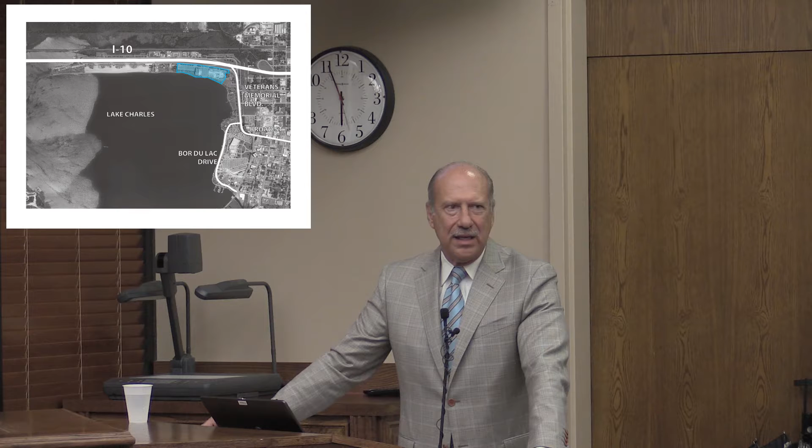So hold that thought for a second. If you tear it down, we have about 400 parking spaces in that garage. Tear it down, it would take about 4 acres to replace that amount of parking at grade. 4 acres of developable property in a downtown is extremely valuable, and I would argue that that deck makes huge sense to maintain, to create a functional component for whatever you do.

So how do you overcome the weaknesses? Well, you'll see some discussion about that. We're going to light it, renovate it, add new elevators, but we're going to keep it, and use it in a way that can be leveraged to accommodate the mix of uses we're proposing. So keep that in mind.

Bilbo Cemetery on the eastern side, everybody kept talking about it, but when we visited it, it was almost indistinguishable from the backdrop. It was not this civic piece, this historic component. So during the workshop, we decided, based on the input, that we should celebrate it. It should be part of whatever we create, part of the fabric, part of the history. And so we'll engage it. And then obviously we're going to engage the waterfront.

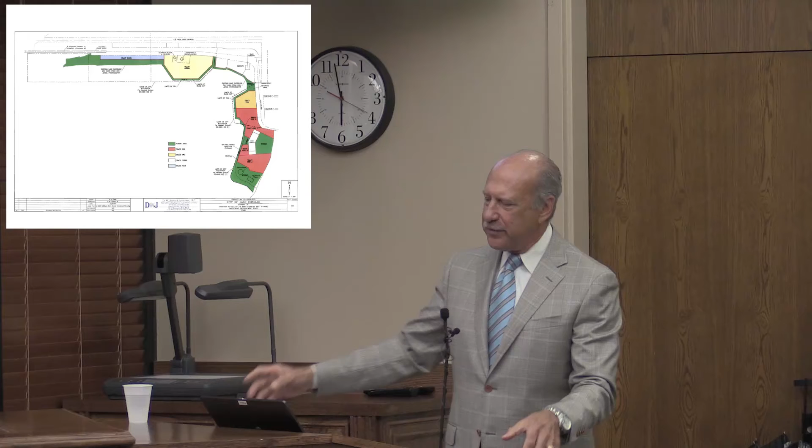During the charrette in 2007, and again prior to the charrette in our preparation for this workshop, we were envisioning this magnificent marina, this romantic kind of European place where we could see sailboats docking. Unfortunately for us, that area of the lake has been silting in for a while, and it appears as though it will consistently silt in. So from an economic perspective, it didn't make total sense for us to go in and create this marina.

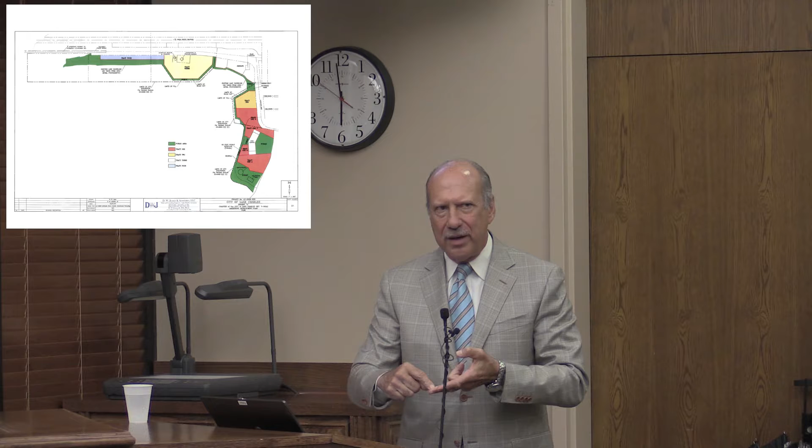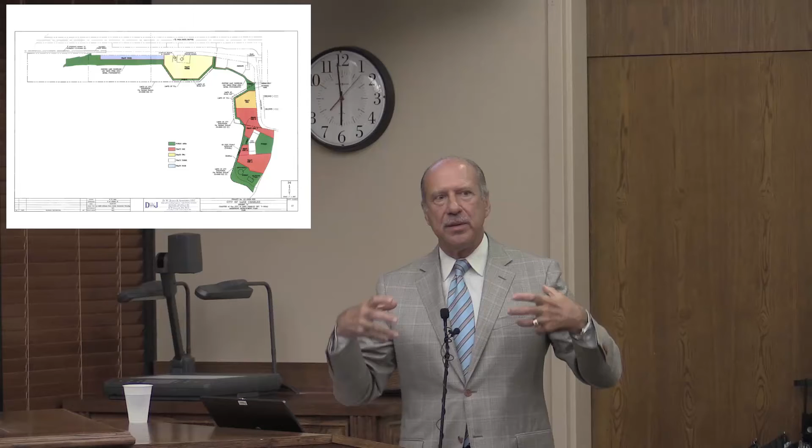But we did want to acknowledge that we're on waterfront. We want to engage it in more ways than simply looking at it. And it came out over and over again that boaters in this community would love to be able to take boats to a place where they could go to food service places, retail, venues of entertainment, things of that nature. So what we did, as opposed to having to dredge this periodically and frequently, we would bring finger piers out into the lake and allow boaters to come to the finger piers and access the waterfront and the docking facilities. So you'll see that in this presentation.

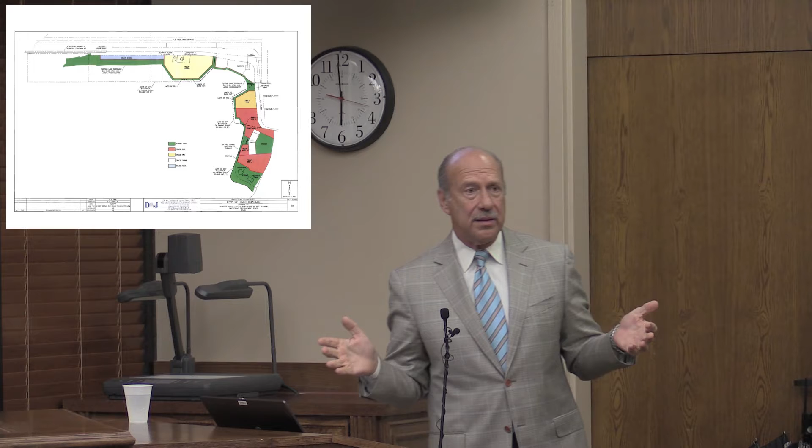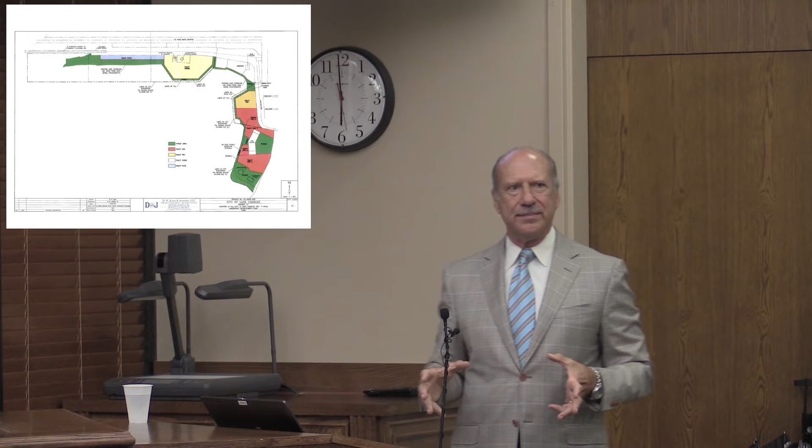The other control point we had was that there is a mandate in the master plan and in legislation that there be a 25-foot public walkway fronting the waterway. You cannot make it private. So we had to adhere to that, which we found to be actually an amenity and not a negative. So keep in mind, when you see the drawings, that was part and parcel of what we wanted to do.

The other thing we did is we tested the participants in the workshop. We said, listen, as you have a clean slate, we can develop any kind of buildings you want. You can do modernist, you can do traditionalist, you can do something in between. What would you like? And overwhelmingly, people said, this is Lake Charles.

We want it to be Lake Charles. So let's celebrate Lake Charles. Actually, there were some people who said, let's look like Austin, because Austin is a big success now. Let's create Austin. And the group, the way the process works, said, why do we want to copy a place that really isn't us? Because let me tell you, you have one of the most significant historic fabrics in this state, and do not ever question it.

You need to celebrate it. Now, there's some challenges that we'll talk a little bit about. So in the development of the pattern language that we're going to be proposing to developers, we're suggesting to them that this is the language we would like to move forward. It's not necessarily an option for them to change that.

The next thing is the context. What are we dealing with? What are the positives? What are the negatives? So these are just slides. Our team was here a few weeks before the workshop. We spent 2 days actually going through, doing sketches, talking about some of the assets and the positive and negative, and tried to understand how we could leverage what you've already done.

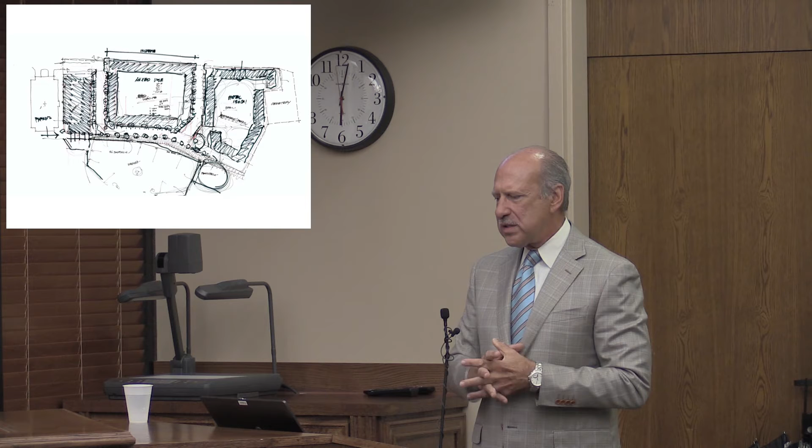What we used in this diagram was the market studies that we acquired in 2008. Immediately after the 2007 plan, your administration said, let's get moving. What's the next step? So, well, you have to identify your market. You don't want to just shoot in the dark here. And we hired 2 companies, one out of New Jersey, the other out of Rhode Island, who are specialists in urban place, and they came in and forecasted the market.

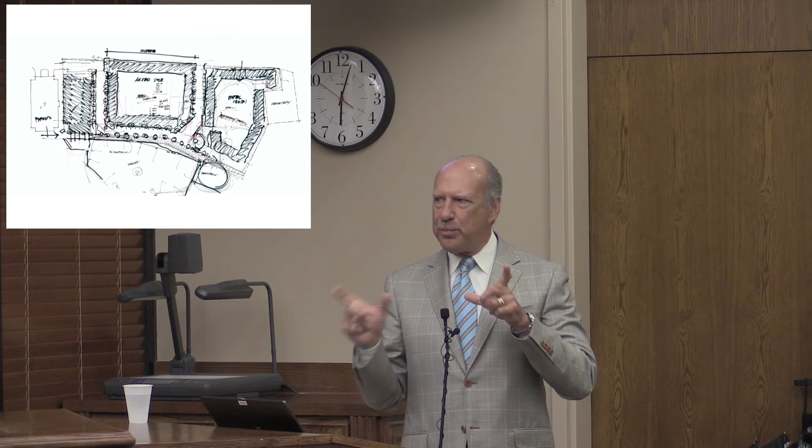And it was pretty soft, and they were concerned, but there was a general understanding that we needed to introduce living, we needed to introduce retail and commercial, we needed to introduce a venue that was catering to a younger population. Now, today, with the advent of the activity that you have, that is only more animated. And the truth is, the market that you need to be focused on is 2 primary demographics. The younger 24 to 32-year-olds, which will be coming in here, we believe, in a pretty significant way.

And they're going to be looking for a lifestyle that, unfortunately, Louisiana in general does not offer. And we're losing that population to other places. This is the opportunity to invite them back. New Orleans, on the other hand, it's a new frontier for that generation. It's called the millennials. And so what are they looking for? Well, they're looking for an urban existence. They're not their grandparents, although their grandparents are turning into them. We'll talk about that in a second.

They are looking for a kind of an existence that is exciting, that does not have a lot of maintenance associated with it. They're very mobile and nimble. They want sustainability, efficiency, they're very green. And so the urban lifestyle is what they crave. And that's why the Austins of the world, and now Houston and Atlanta, the Bucktowns of the world, they're the recipient of all of this activity. Your Sasols and those people of the world are going to be hiring a lot of that population.

So how are we going to get them here, and more importantly, keep them here? This is how you do it.

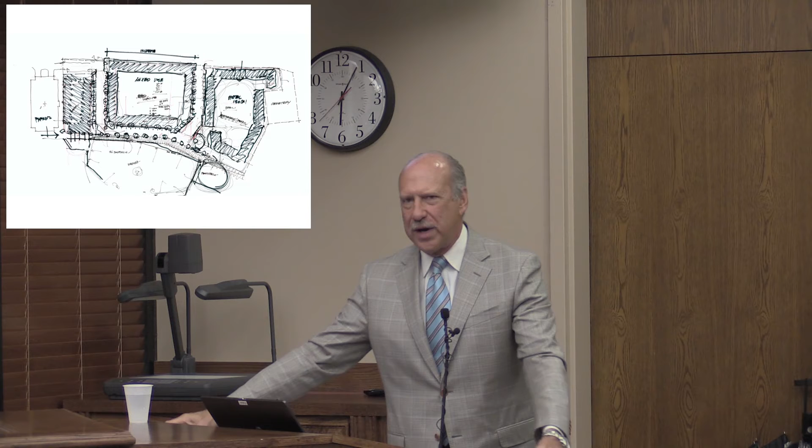Now, on the other end of the spectrum, their grandfathers are turning into the millennials. What's happening is the boomers are actually beginning to migrate to the urban centers as well, because they too are learning that the romantic notion of cutting 5 acres of property and painting a 5,000 or 6,000 square foot house every 3 or 4 years isn't what it was cut out to be. They're beginning to want this kind of lifestyle as well. So we know there is significant depth to the market for those 2 demographics.

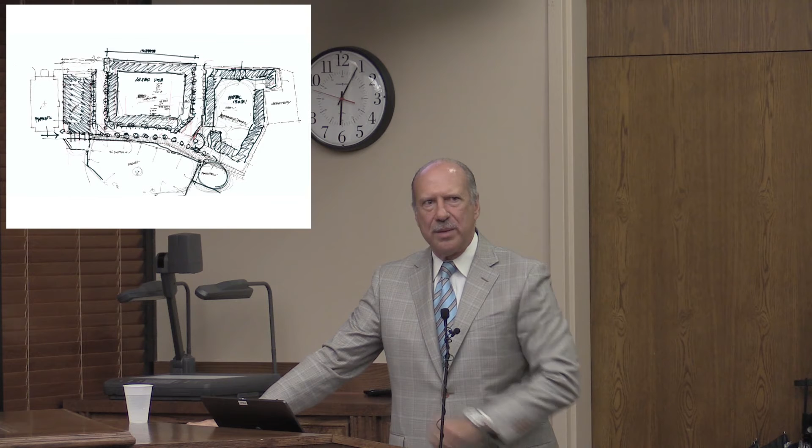Now, when you do living, you also need the 24/7 components. You're downtown today. When I drove here, your parking lots were relatively full. Right now they're empty. You don't have a 24/7 downtown. They're leaving at 5 o'clock or thereabouts. If they lived here, they would be here 24/7, and all the activities they require to stay here would be built.

What we're trying to do is prepare this seed to accommodate that vision, so that the rest of your downtown, paralleling your 2007 plan, will begin to follow that pattern. So what we're doing here is beginning to look at that market.

The middle block, the square that you see, is what we refer to as a live-work block. It contains restaurants - we believe there can be at least 4 restaurants in this product. It will have retail; we have 34,000 square feet of potential commercial retail in this block. And we're looking at a model of about 200 residential units, because that's a model developers find economical and easy to manage and construct. So that's what that component looks like.

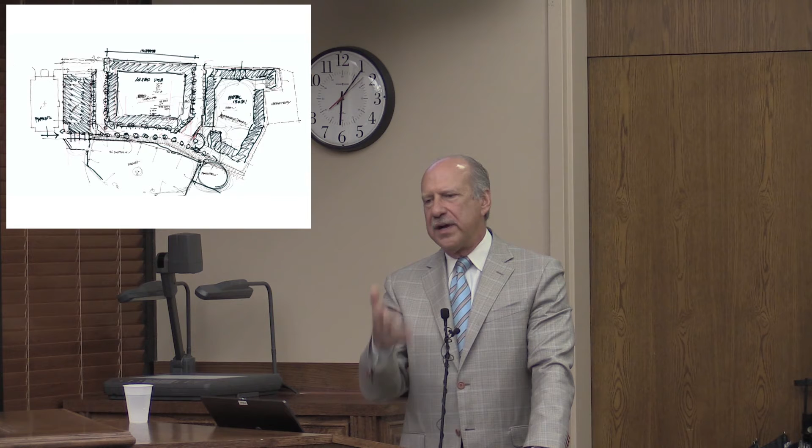To the right, we have a hotel gestured. The market, we believe, is strong. 6 weeks prior to the workshop, we had calls. The mayor was being contacted, and you're going to find people all over the country looking at Lake Charles. We've been contacted by a Canadian interested in working here. A lot of people are starting to look at Lake Charles because of the activity. We had 2 hotels contact us, interested in what we might have in mind. One was more interested in another location in the city; this second one was interested in this product.

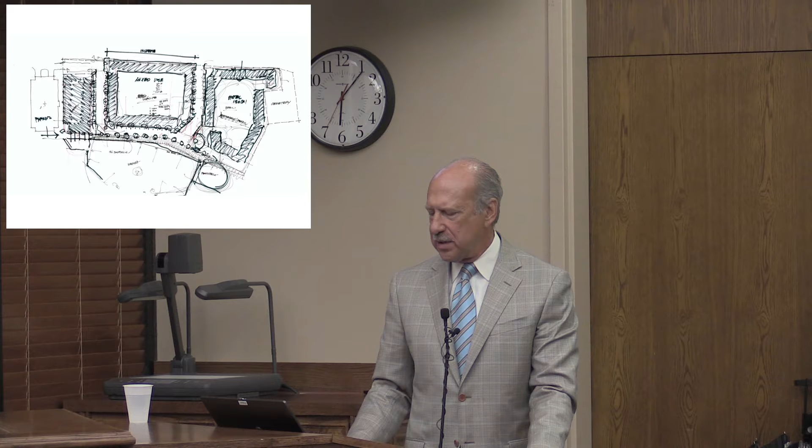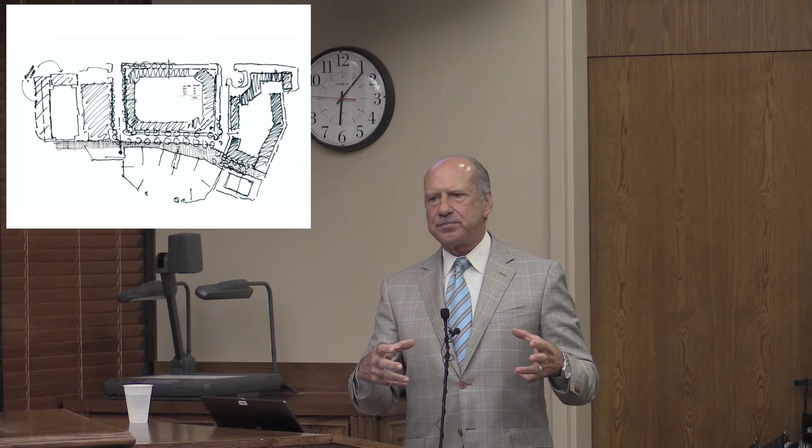So as we float this to the top, you'll start to see a number of different uses become more apparent. We developed the concept a little further, thinking about connectivity. By the way, I mentioned connectivity earlier - it's not simply about connectivity to the I-10 corridor, it is connectivity to your current urban fabric.

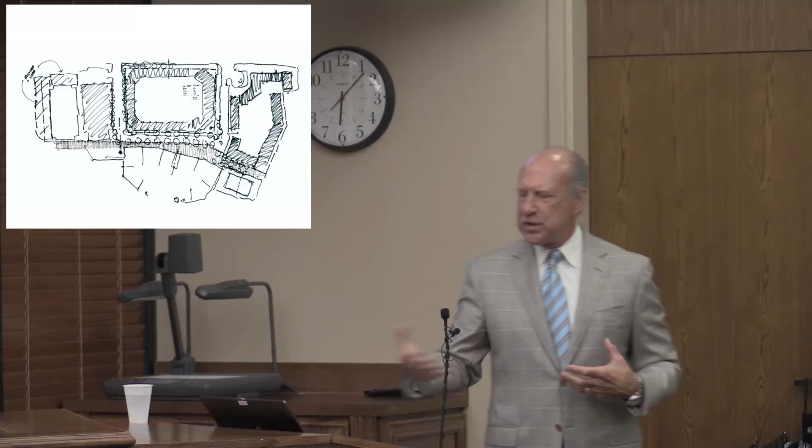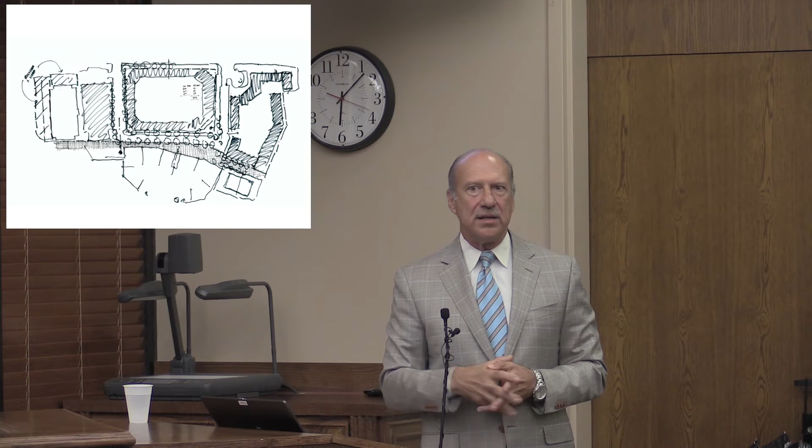Your current streets need to grid into this project. You need to be able to get to this site without having to drive around I-10, underneath the bridge, to get here - we have to grid in. We need to connect for pedestrians. I hope that when this product is built, you'll be able to walk from the Civic Center after an event to have dinner at a restaurant located on the boardwalk in this project, and actually stay in a hotel here, or even live here.

That's the dynamic we're looking for - you may not need a car. That's the hope. So we're finessing the drawings, and these are sketches. We had 5 people working full-time during the workshops, and all of the information was being disseminated.

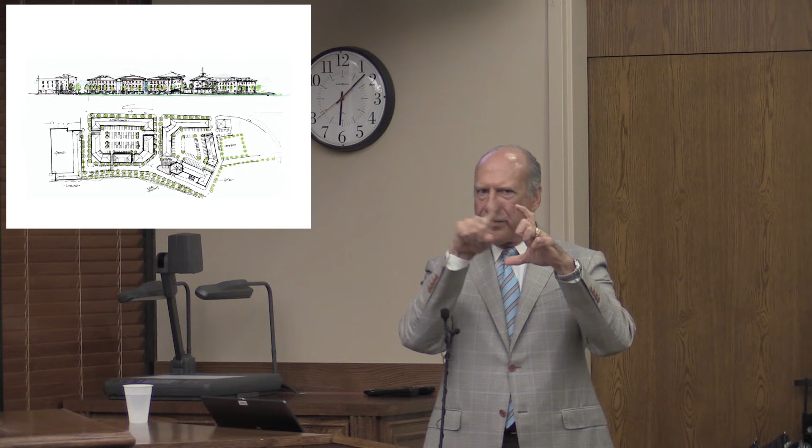The block I mentioned earlier in the center was a live-work block with apartments, primarily rental. Someone mentioned, well, how can we buy a place there? We started to think about how we accommodate purchasing. And in this diagram that you can see, you might see apartments written on top.

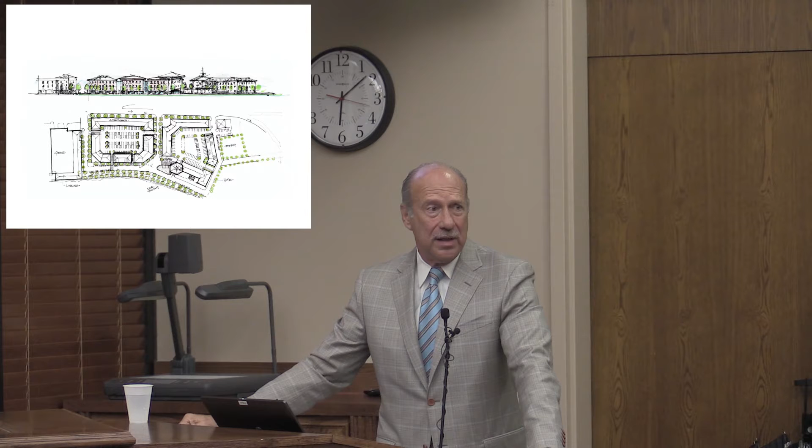Someone said, have you ever stood on I-10 and listened to the traffic? I said, no, I can't say that I have. Sounds kind of interesting. So we immediately went out there and stood on that highway, and I came to an amazing realization that we can't sell rental or condominiums facing that I-10 corridor. But we can create a hotel that creates a buffer for that housing.

In the next scheme, we took the hotel and created the liner for I-10. We can design the hotel to deal with the decibel levels. The living component is a little more difficult because of price point.

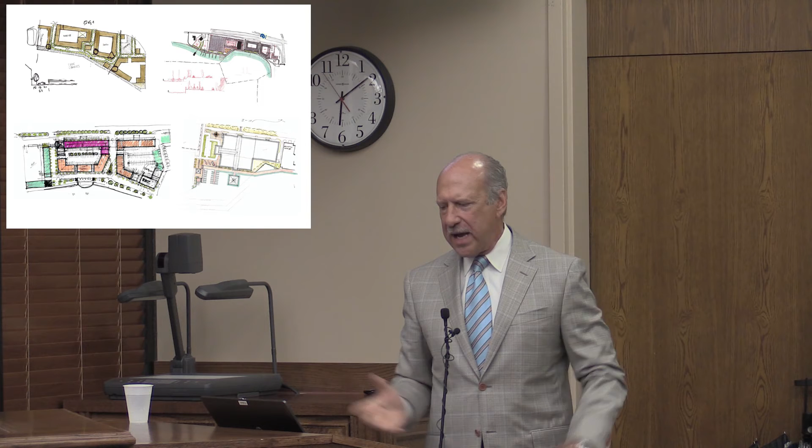We developed about 13 different schemes testing all the information we collected. These are those drawings. The purple drawing in the lower left was the beginning of discussing what the size of a hotel would be—this is a 120-room branded hotel. A lot of people wanted a boutique. Boutiques could be fine, but we felt we needed to at least float to the top the concept of a brand.

Then we developed what we refer to here as the final draft. And I want to stress draft. We are listening right now.

We're still listening. We will be listening for a while. The developers are going to come in and listen even further. You need to say to me you don't like this, and I'm open to that—totally comfortable with that. But tell me something positive. What can we do differently? What do we need to do differently? But keep in mind, we had a vision. We're maintaining that vision. We wanted to keep moving our community forward with this kind of collective vision of things.

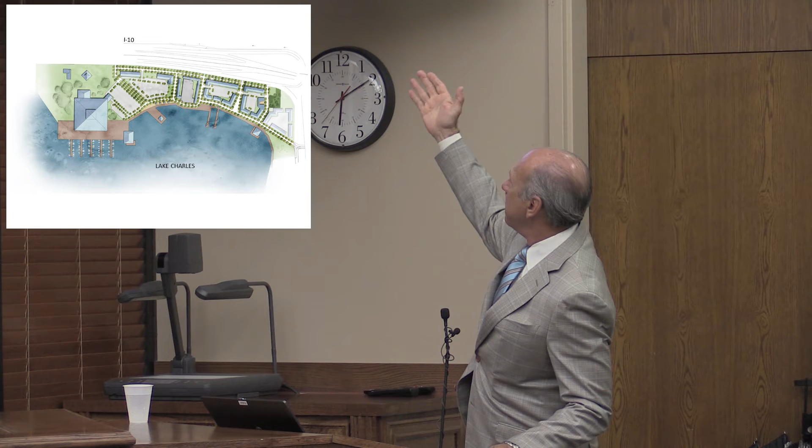So this is the plan. Now the center building—unfortunately it won't work on that screen. The center building, here we go. This is your parking garage.

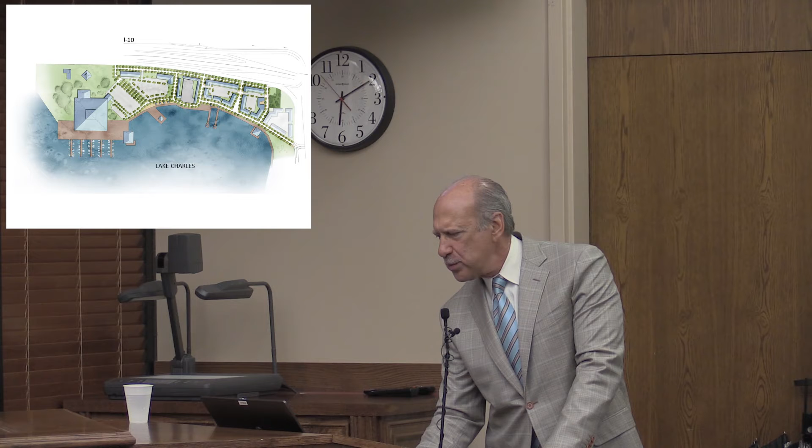The 9.2 acres is to the right, and this was really our commission to develop. But in the beginning of the workshop, people began to talk about the property to the west of the garage, asking why aren't we doing something with that. So we felt obligated to begin discussing what options you might have.

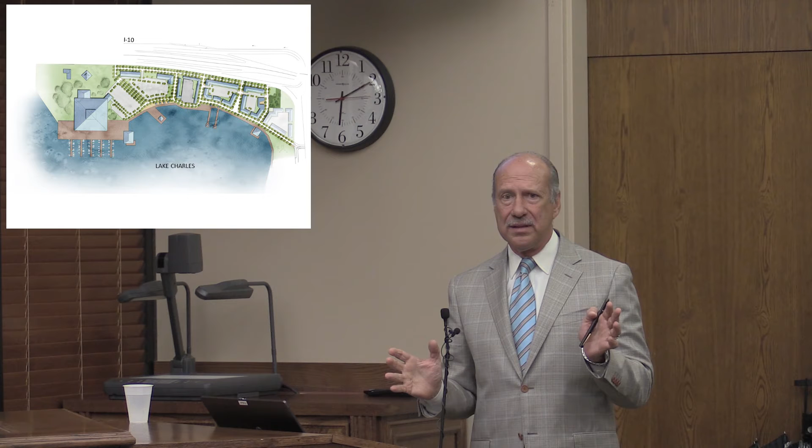Now the big differential between those two properties: the west, the city cannot sell, it can only lease. The east, it has options to do anything by law. So we wanted to approach it differently so we could play that out.

So what you're going to see to the west of the garage is the notion of what if we had a major national tenant come to us—which we already have, by the way, an outdoors company—180,000 to 200,000 square foot footprint, wanting to locate in Lake Charles. How would it fit? We couldn't put it on the eastern property. It wouldn't fit, we couldn't park it, it couldn't fit on the site.

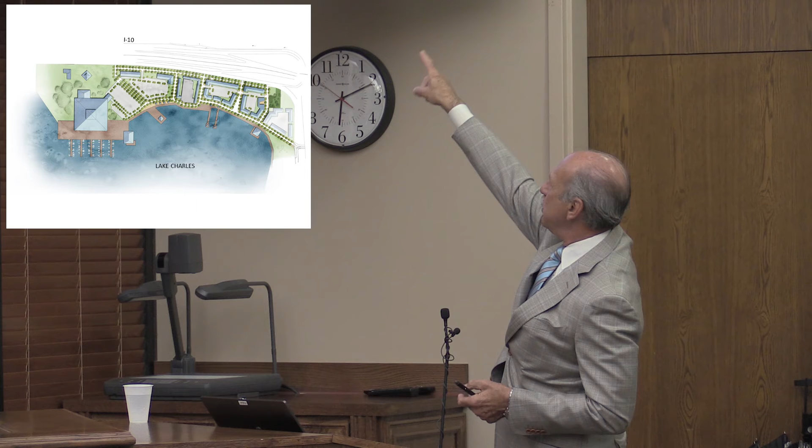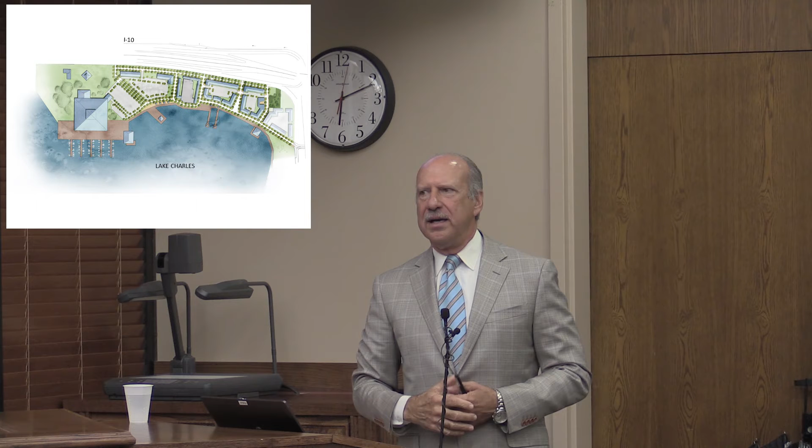So the footprint you see on the building to the left, the big square roof building with the marina component, is 185,000 square feet. Big box guy—I won't throw out names, but you probably already know who they could be. Pretty cool things, and that can only be accommodated because we can fill out into the lake. I'll show you how it actually lays out in a second.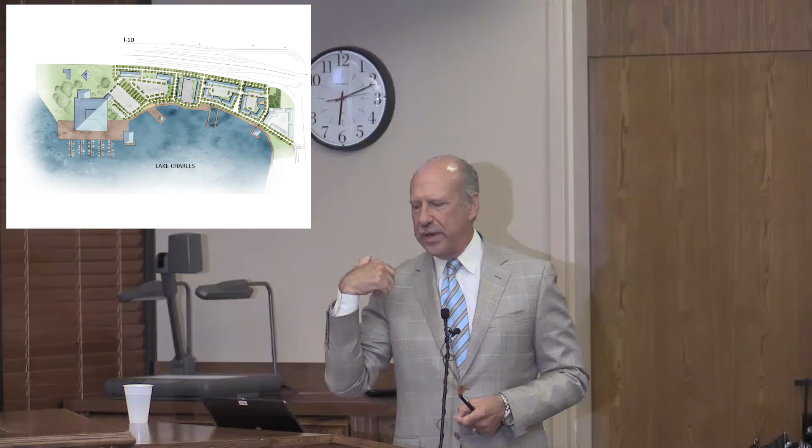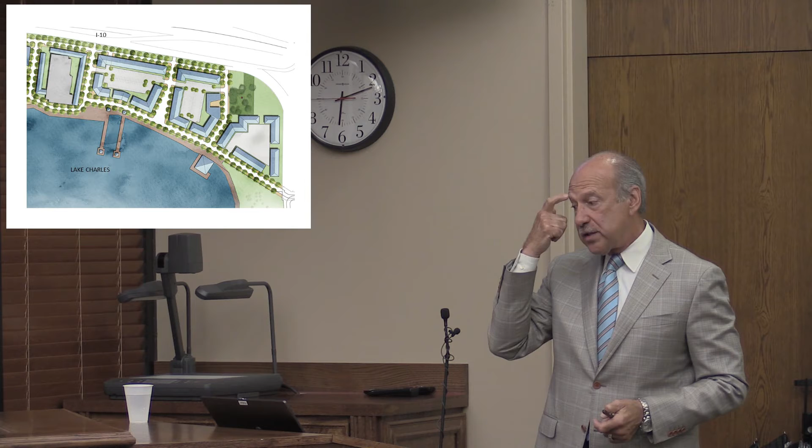So let's focus on the 9-plus acre property. The buildings are pretty much paralleling what we just talked about. The uses I spoke about are outlined here, and here's that garage. What we're proposing is a liner building—this blue building all the way around. We're buffering it with a 30-foot easement that allows us to provide services on the back side of those buildings. We envision terminating the building at the edge of the garage with a restaurant. It doesn't actually engage the water, but the vision is that this restaurant could also have outdoor seating on the boardwalk, the gray area located here.

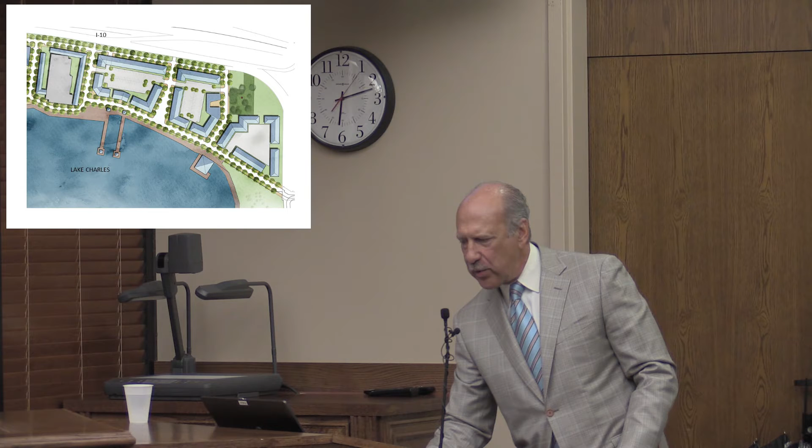The live-work component is 34,000 square feet of commercial mixed use, and we don't define specifically what it is. We envision 4 restaurants: at least 1 restaurant anchoring the garage, and 2 restaurants in line with the live-work on the waterfront. We also envision the potential, which came up in every meeting, of a standalone restaurant out into the lake. That's not permitted today, so we'd have to go to the next step to get that done, but in time we could do it. We showed it to show how it could occur.

What you see in white is public streets. They're not private, they're urban, they're on-street parked, street trees, 15-foot sidewalks, very urban. The buildings follow your comprehensive plan. They're 4 stories tall, could be 5. We felt 4 accommodated the market and we could park it on site. So these buildings are roughly that scale.

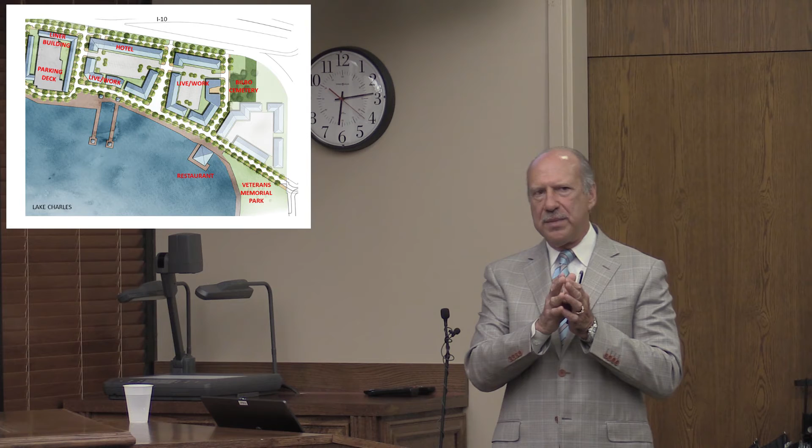You have 2 blocks. The hotel buffers the I-10. As you go east on the service road, the sound is diminished significantly. So what we did is we provided for a live-work piece to the far right, another 200 units. This roadway connects and continues east.

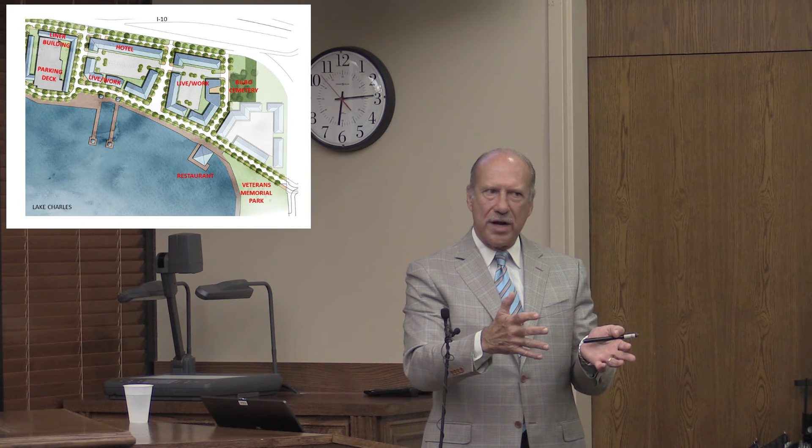Veterans Memorial Park is now going to be part of a major street that connects to Lawrence, aligning to Lawrence Street. So now you'll be able to come from downtown, take a left, and go directly into this project without having to deviate around the I-10 corridor, which is mandatory for us to animate and connect to the life of the downtown.

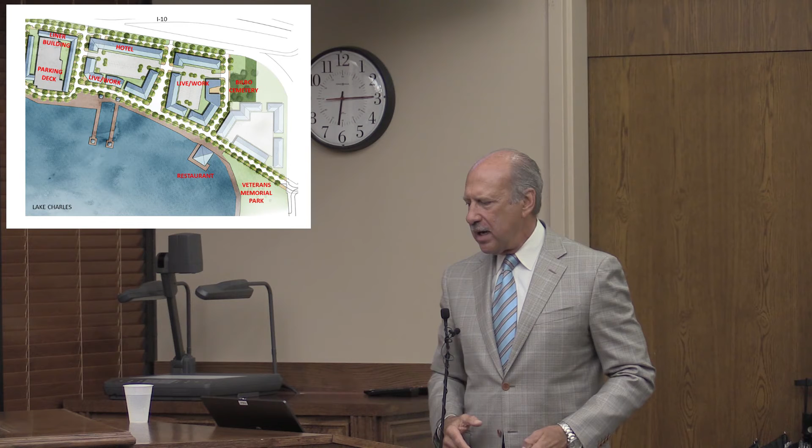You can see that we're running a new roadway along the frontage to Bilbo Cemetery, creating connectivity to a pretty significant history of this city, and we intend to rebuild that cemetery as part of this project.

So then we move to the west, the big box concept. The idea here is we'd have a sports and outdoor retail component, additional restaurants, and we're also proposing connecting the roadway mentioned earlier from the east, all the way through here, going back to the frontage road at the visitor center.

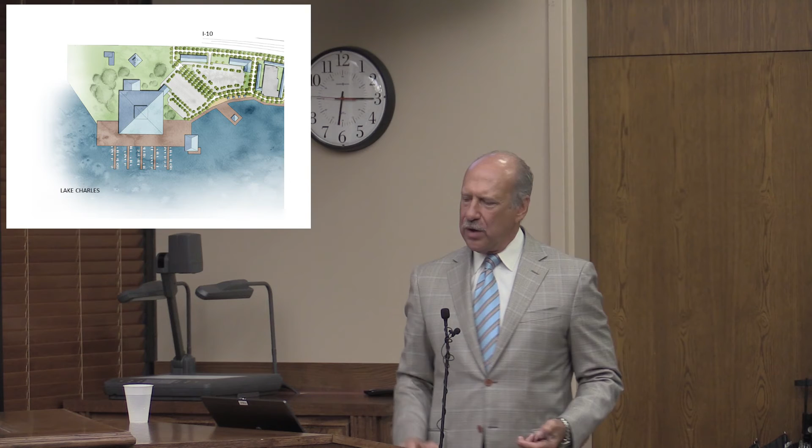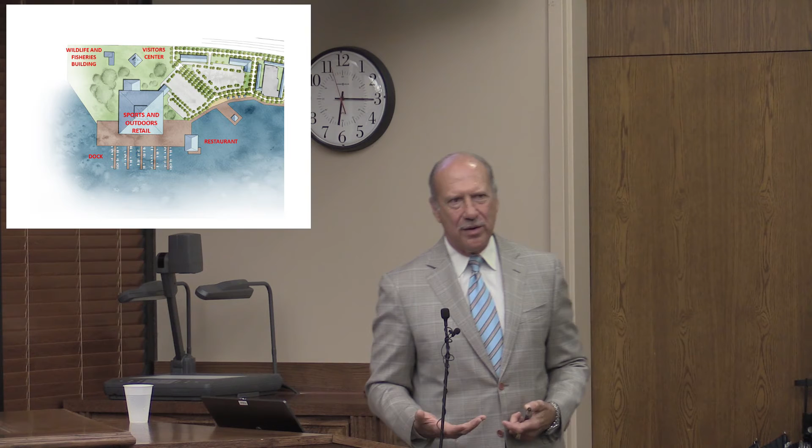So the hope here was, you already have a visitor center, you create this big box potential retailer who has a draw into the community. It celebrates the visitor center with new life it wouldn't get otherwise, and begins to animate all of the other uses, connecting it to the live-work pieces. It's all connected by the boardwalk.

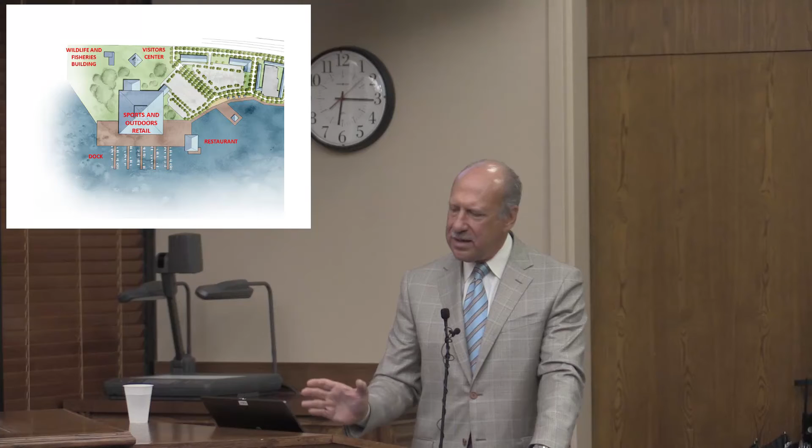And then further to the west, we have the beach. We have that activity, we have lots of concepts for that. We didn't take it that far yet, but you have the potential of being able to expand it.

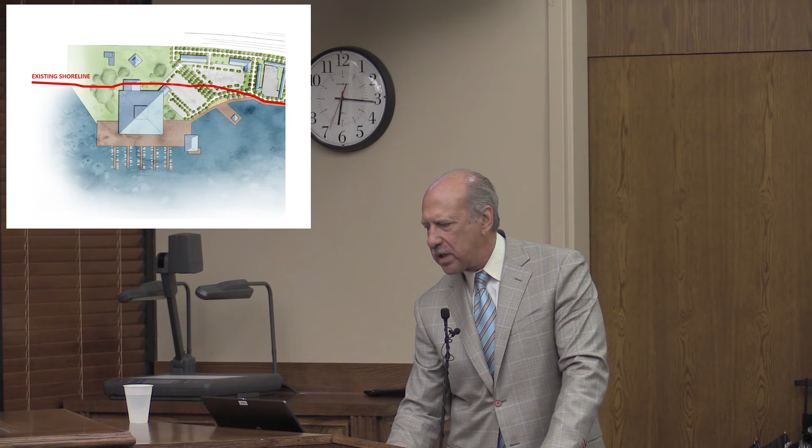This red line represents the bank today, so you can get a sense of what it would take to accommodate the big box concept. The buildings on the outer edge are potential retailer, live-work. The liner along the garage is a living piece. So those are things we would look at using.

So what would it look like? Well, these are our renditions of the history of this place. This is more about the scale, about the public streets, the 25-foot public way that runs along the water, continuing the whole idea of the boardwalk you've already built. The two piers you see are 300 feet out into the water.

We looked at Google Earth and tried to get a sense of where that sedimentation was occurring. We're told the water depth in this area is about 5 feet. So again, it may have to be further out, but the concept is that people can come to this location by boat, dock their boat, and go in to restaurants and activities that might occur.

The other thing that happens is the 25-foot mandate, because of the configuration of the land, expands to about 85 feet at the center point here. So you have another venue for outdoor events. It could be concerts, it could be a number of different things.

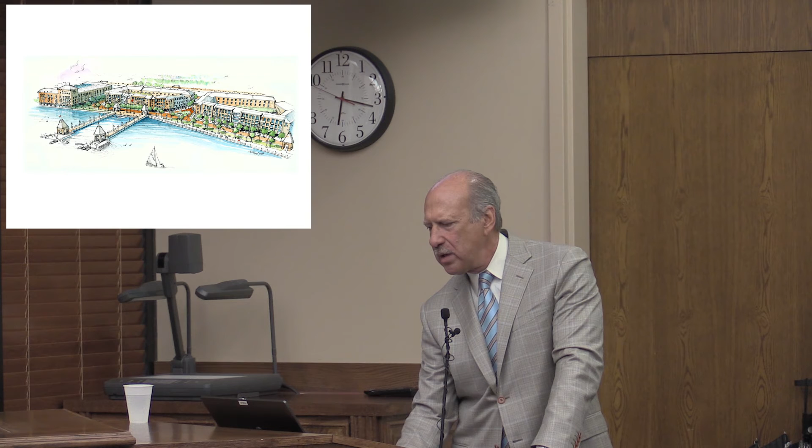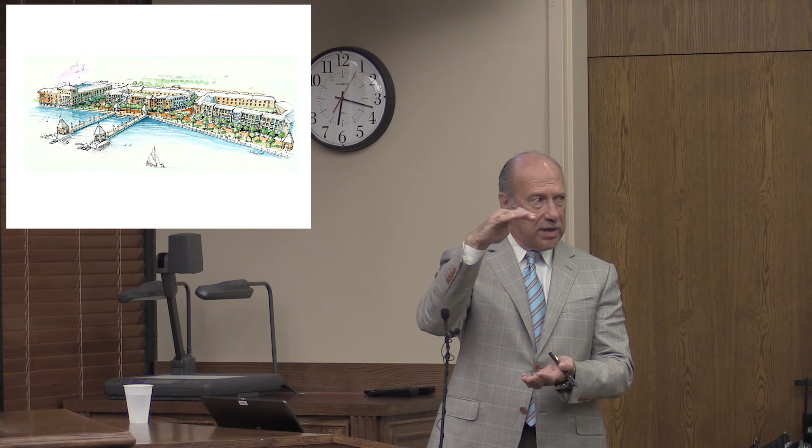Pretty easy. Now, you don't have a lot, you have 32 units of that product. There aren't a ton of those. So this is a concept drawing. That sailboat is stuck there, it can't move.

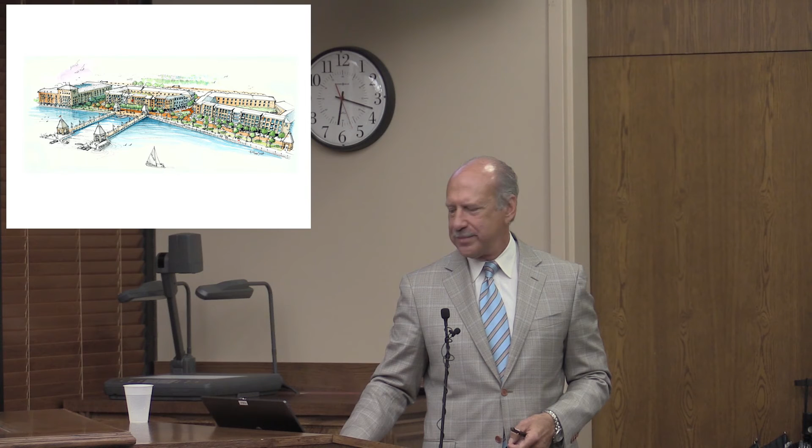And then moving in, I'm coming in from Contraband Bayou on Friday afternoon to go to a couple of restaurants that might exist. By the way, we believe that this location can support some pretty serious restaurants, square footage-wise. We're also a big believer that the first step for our developer will be to scan the local market to find out what locally can work here. Our goal will be to promote a local kind of existence, although it doesn't preclude certainly national tenants.

The other option too with the cabanas that we're showing out here - this came up repeatedly - is that you might have a lake, but there's no real way for the general public that doesn't have a boat or a way to get into the water to engage with it. So we talked about the opportunity to have venues that would offer rental kayaks, canoeing, things of that nature. So these venues could also be expanded to include that.

Let me back up. Okay. This view is taking a view from Veterans Memorial Park.

So we're building now the new 25-foot boardwalk. You're coming into the Pinnacle site. You can kind of see to the left the pier that goes out. To the right, you'll notice the street furniture, the lighting, the concept of landscaping. All of those things are simply picking up on what you've already done and continuing that entire boardwalk along the edge to the new center that we're creating here. We're looking for a good name, by the way, so if you come up with one, we'd love to hear that.

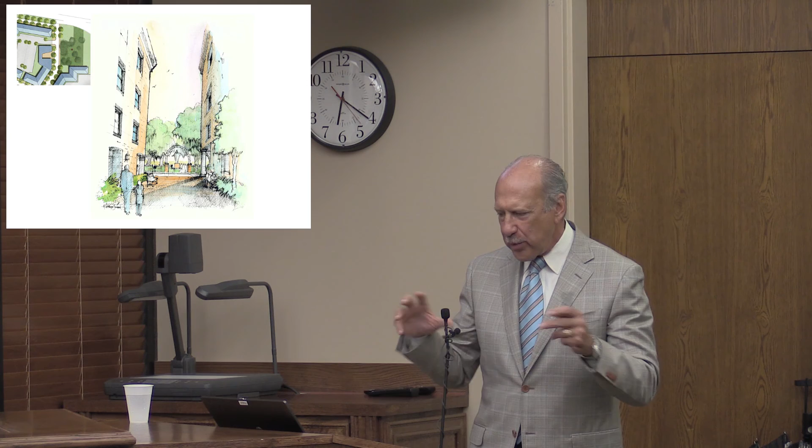Now, we've had lots of input to generate it. We've created some other kind of views - we want to try and terminate our views into the fabric you already have. This is a view into the cemetery. I mean, that cemetery is absolutely phenomenal if we were able to clean it up and actually focus some of the architecture on it. So this is kind of a view of where we would go with it.

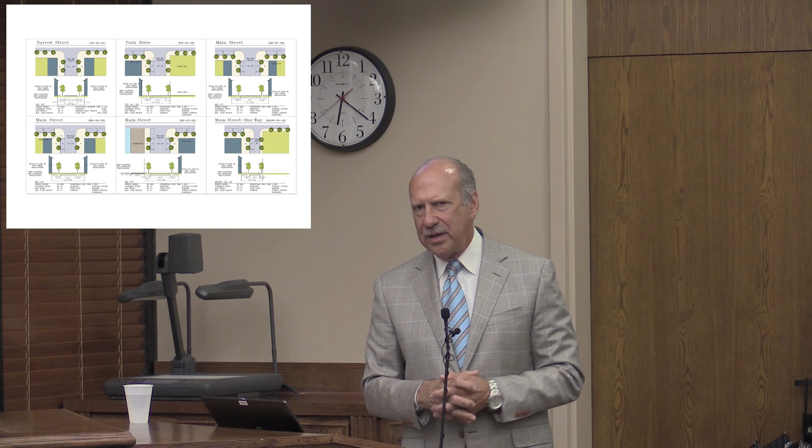Now, we need to take all of these ideas, and we're going to develop - you know, I said a 30,000-foot view was the code that we wrote in 2007. This concept is at a 5,000. We're going to drill down to ground level, and we're going to create the standards.

And those standards - this is just an example of what they will be - specify the social tools that are required to make it work. You know, the streets don't work if they're 50 feet wide. We want walkability, so they have to be slower. Street trees shade the pedestrians. They create this outdoor space that has richness to it. So we define all of that.

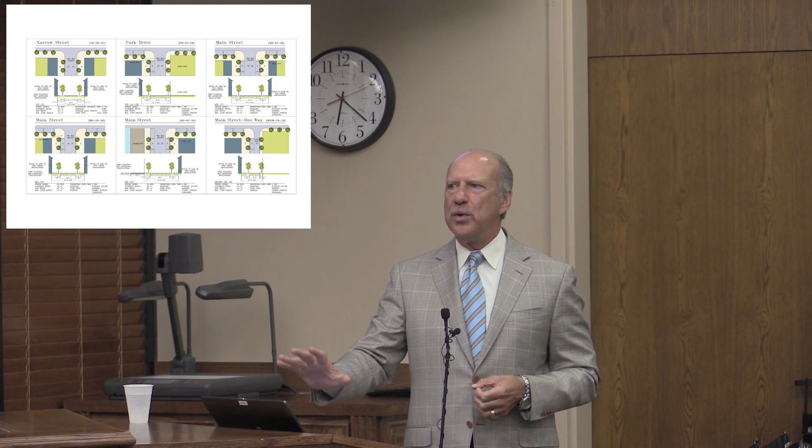So the developer who would submit a proposal is not guessing what we want. This is the rule. Now, they may design it differently, but the specificity of what it is we will mandate is here.

We're going to expand, this is the public domain. We're going to expand the guidelines in the RFQ that Randy referenced, or the RFP, to define the quality of the architecture, the materials, the quality of the boardwalk. All of those things will be defined. The scale.

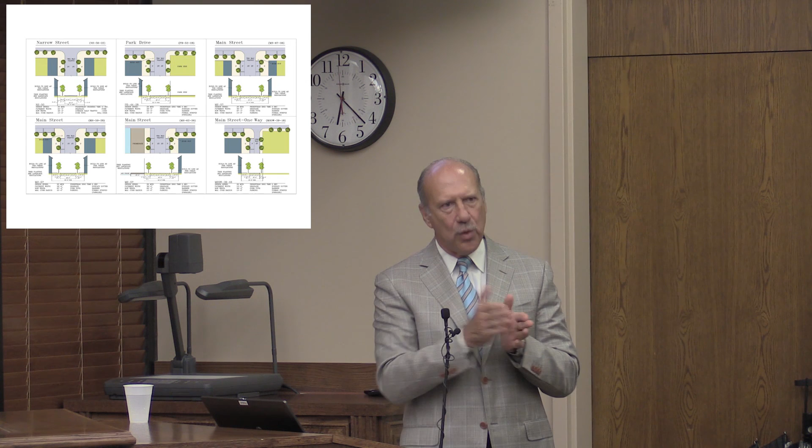And when they get this proposal, we're taking a lot of their guesswork away, and the purpose for that is to cut through the red tape that often accompanies an RFP process. It's just very cumbersome typically, so our goal will be to move this very quickly by answering the questions up front and making everyone take this very seriously. That's our hope. You've been through a couple of missteps.

I don't think they're missteps at all. I think this is actually setting us up for a significant success.